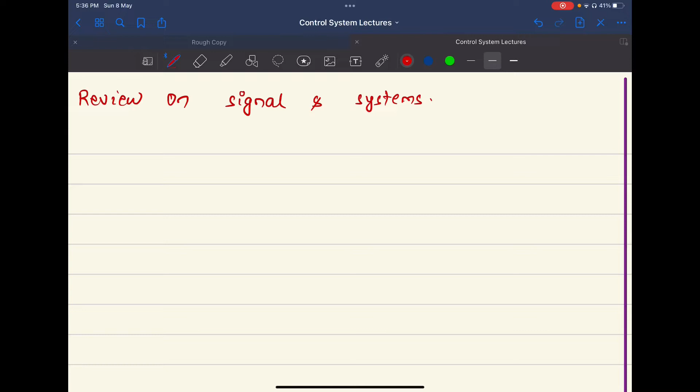On signals and systems. I don't exactly know how many of you are familiar with the course signals and systems, so I will just be briefing you on whatever is required for our course.

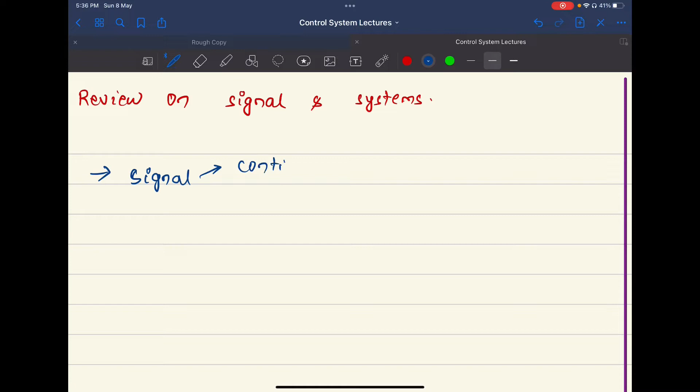One is what is a signal, like continuous time signal or discrete time. Then the systems - what is a system? Then, in systems, I forgot to mention in the last class the difference between a control system and control theory - just a short definition and realization on that control theory.

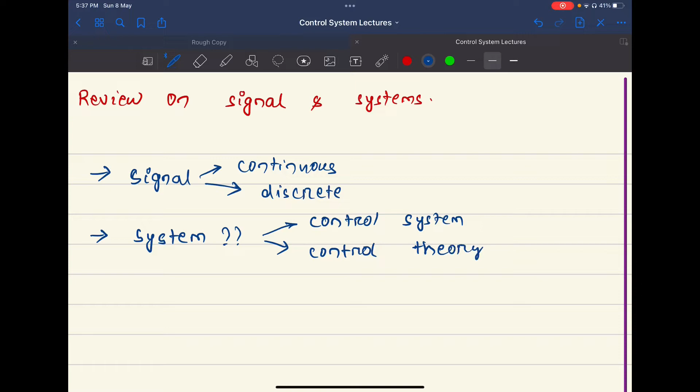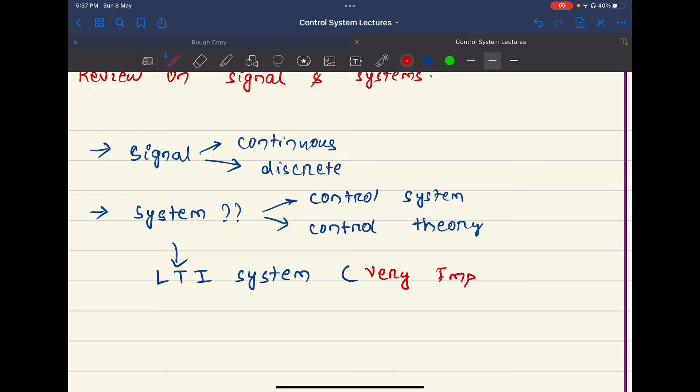Then on systems, I will be briefing about the LTI system. This is the most beautiful property of the control system, very important. So, without further ado, let's start with continuous and discrete signals.

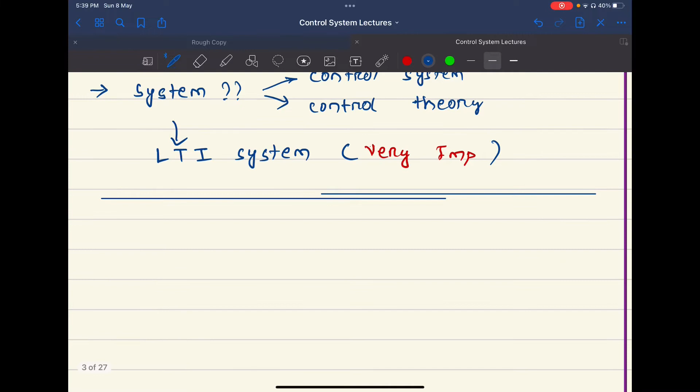So what is a signal? If you search Google, Wikipedia or something, they will say any time varying physical phenomena that is intended to convey some information is called a signal. Just forget about that - signal is anything you want to convey, or signal is anything that carries some information.

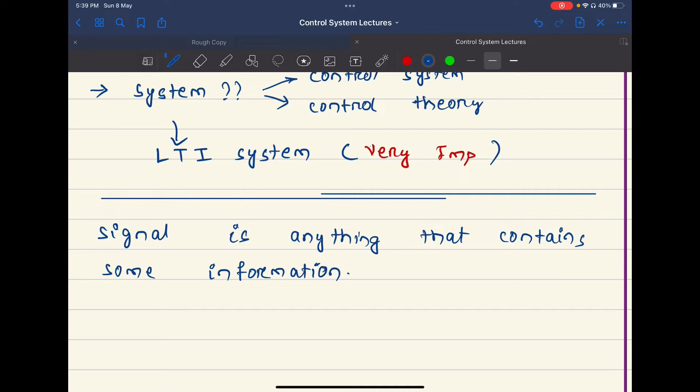Signal is anything that contains some information. Like you say hi to someone or you shake hands - those are all gestures and gestural signals. Here we'll be mostly focusing on the time varying signals or time invariant signals, those kinds of things.

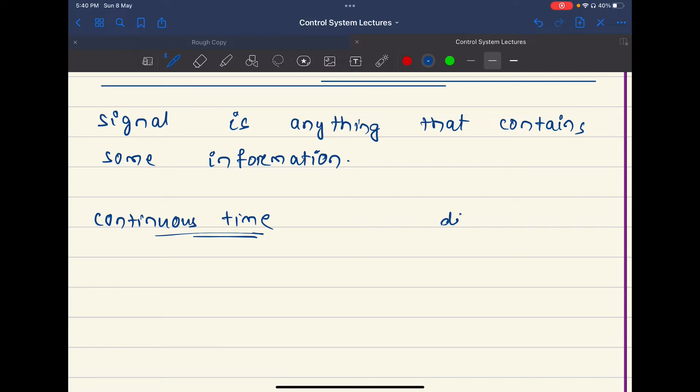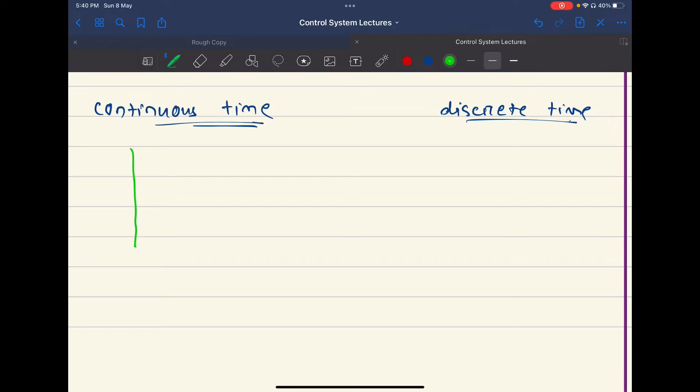So first is continuous time. What is a continuous time signal and a discrete time signal? Basically, a continuous time signal, as you might have guessed from the definition - if my signal is continuous over time, and this is my time axis and this is my x of t, so x of t is my signal.

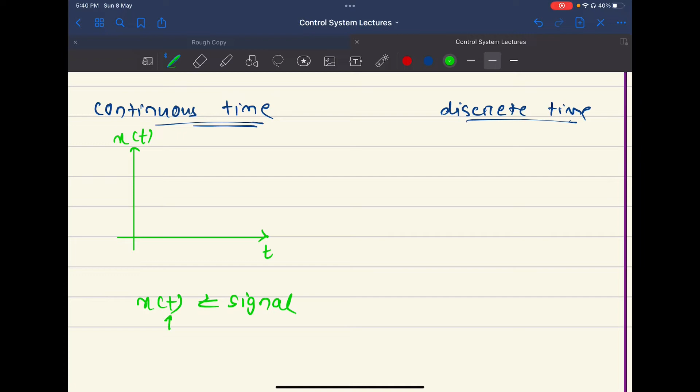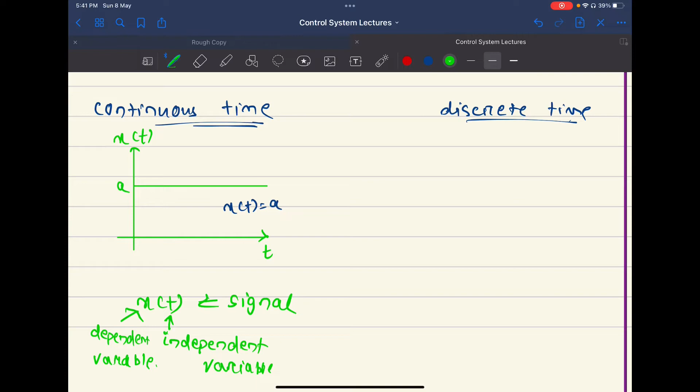Where t is the independent variable and x is the dependent variable. So I have the freedom to choose whatever t I take, and accordingly my x of t will be formed. Let's take a constant signal, like it's constant over time. So for this signal I can say x of t is equal to a. Here my independent variable is time, and my signal is valid over any point of time - however I zoom, like this, I can take any time and I will be getting some value.

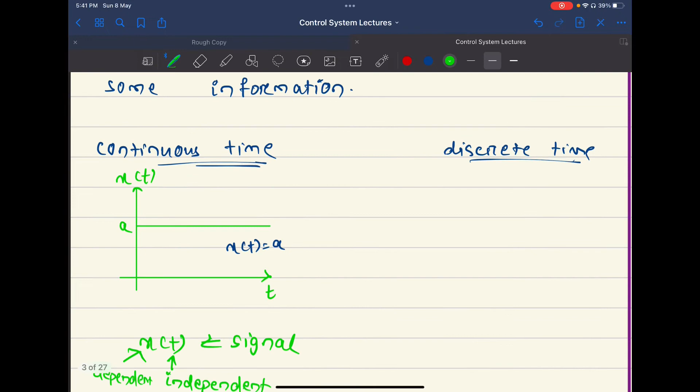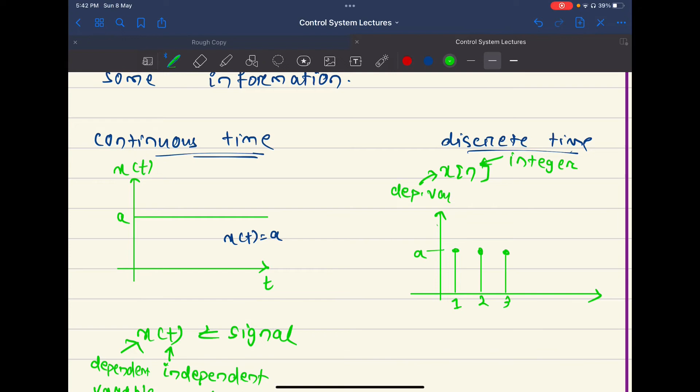What happens in a discrete time signal is the independent variable is an integer, not time - x of n. So n is our integer, which is the independent variable, and x of n is the dependent variable. This signal is not valid over all time - whatever integer we choose, according to the integers, the signal will be defined. The same constant signal in discrete time can be defined like this - 1, 2, 3 - it's a constant value signal, like this is a. In this course we'll be more focused on continuous time signal.

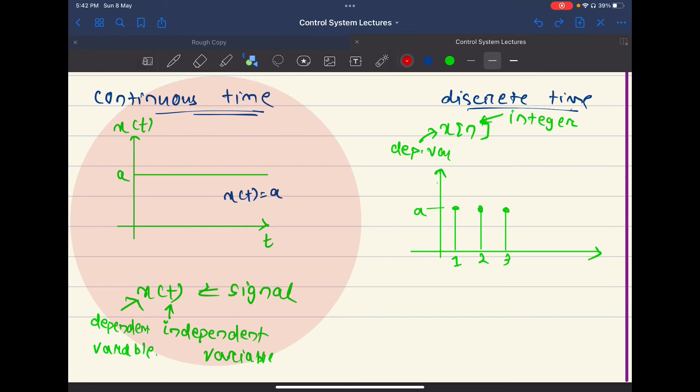We won't be focusing much or diving into the discrete time signal. So now comes the system.

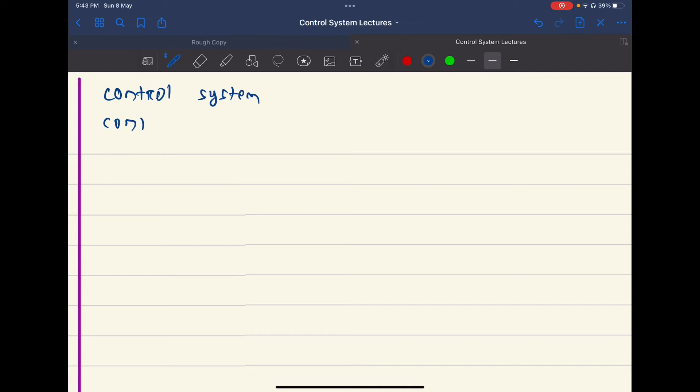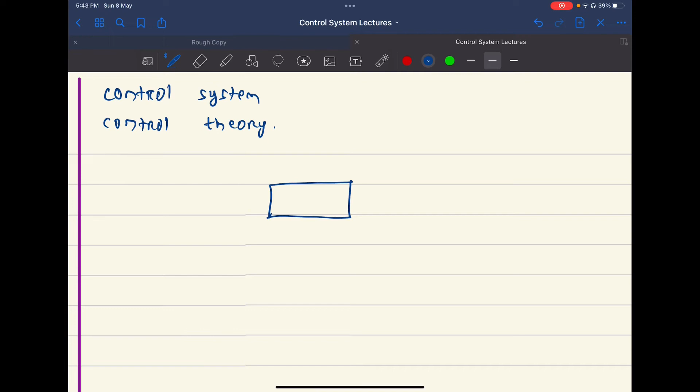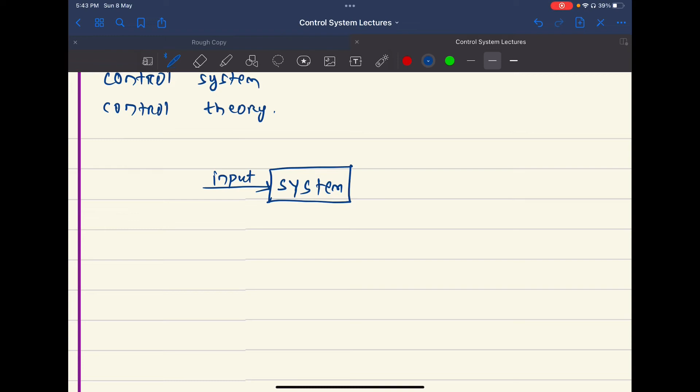So system - as I had forgot to mention, control system and control theory. What a control system is - this is a diagram you will be using so much. This is our system. There is some input to the system, and there is some output from the system.

So the system can be anything - you can take your grinder at home as a system. You plug it in, it's plugged into the switchboard, and when you give the input - as the knob available on it - it will vary the speed, and accordingly it will rotate. So the output is the rotation, like speed, and the input is simply the knob.

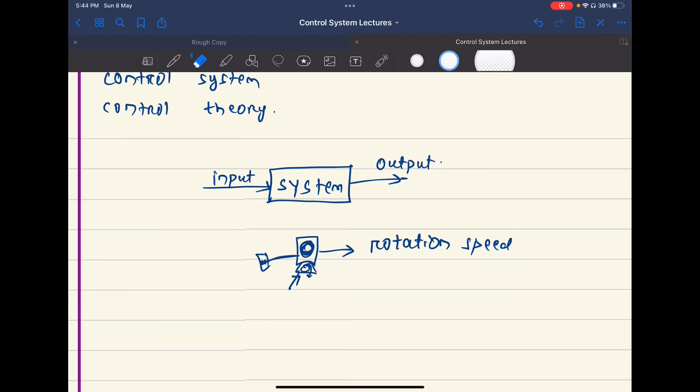Apart from this, another example you can take is a simple system like a multiplier - into 5, like whatever signal I give, suppose I give 2, then I'll be getting 10 out of here. So this 'into 5' system takes whatever input it requires, and it just multiplies it by 5.

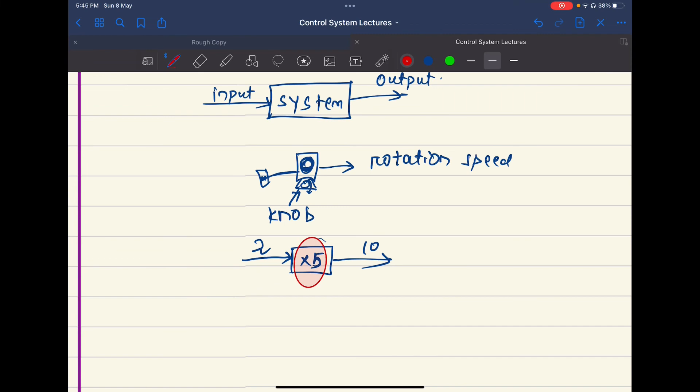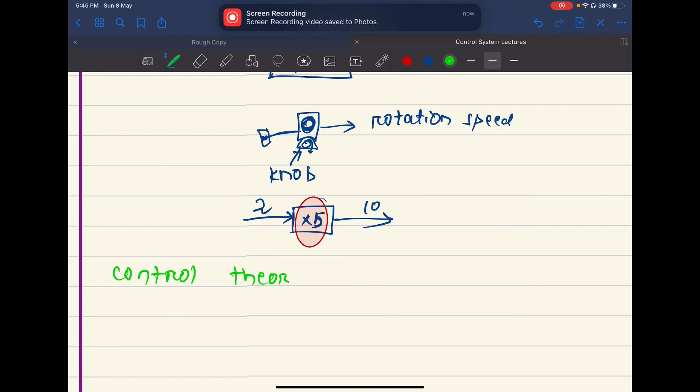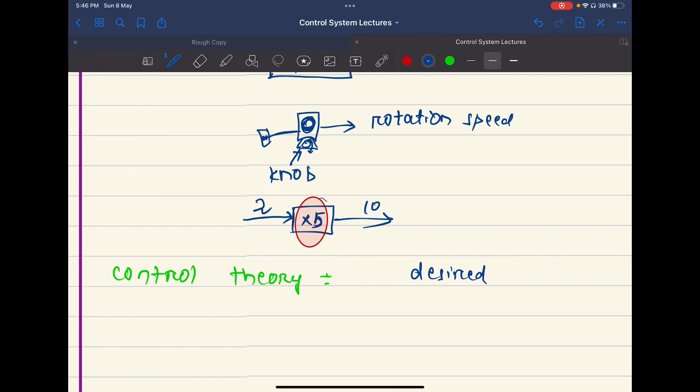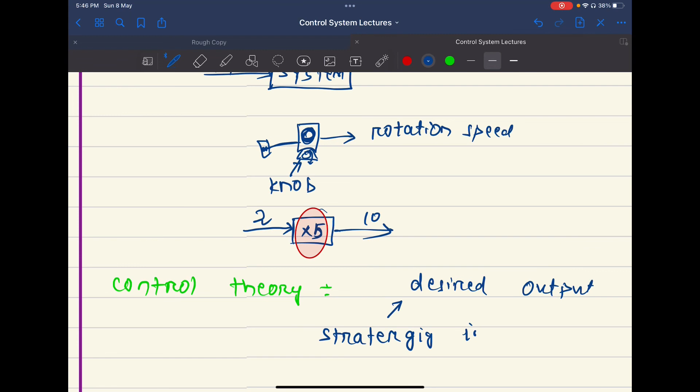So what control theory actually says is: if I want some particular output, if I have some desired output, then I need to strategize my input. I can't randomly give some signal.

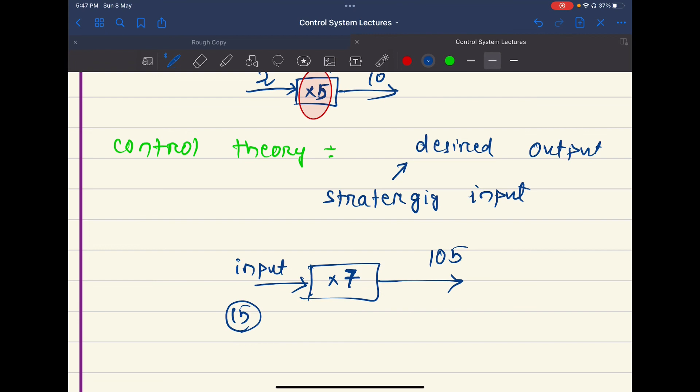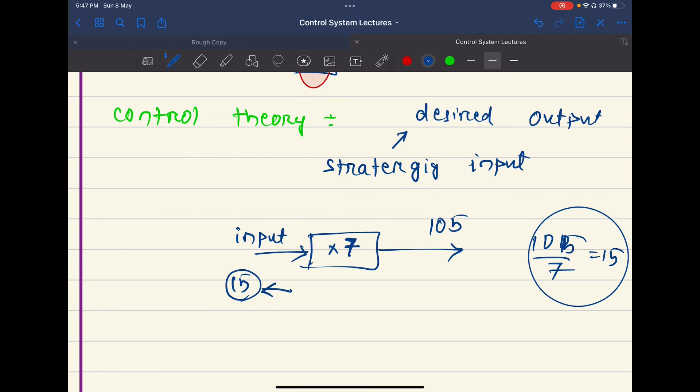Say my system, whatever signal it takes, just multiplies it by 7. Just assume this system, and I want my output to be 105. So what value of input do I need to put so that I get 105? Obviously I need to come up with 15. But how did I end up with this number 15? This strategy - now I know my system just multiplies, so I just divide 105 by 7, which equals 15. This strategy, a very simple one, is what's called control theory.